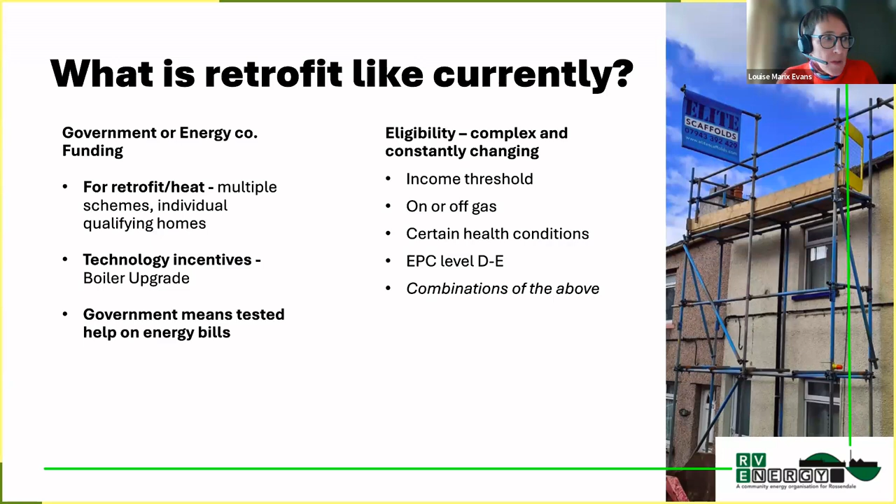So we have conundrums, which is on the next slide. So either we do it individual by individual, which is what many of the one-stop shops go for, so we handhold people through, owner-occupiers, or we might work with an individual landlord, or we go street by street and we tackle a whole neighbourhood across that mixed tenure. So how do we do that and achieve these economies of scale?

So the finance part. It's got to pay. We've got to find a way to pay for it. And the behavioural part. And by that, I don't mean lecturing us about what we should be doing differently as busy people in our homes. What we mean by behavioural might also be termed as practices. So it becomes easy and normal, and my neighbours and friends are doing this as well. It's not a big hassle of paperwork, multiple quotes. So it's an easy way to do the technical, the financial, and the people part, if you like.

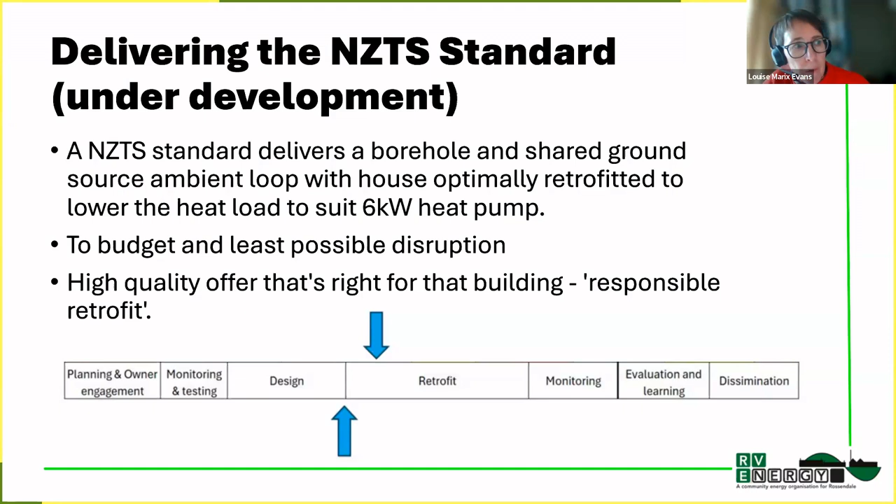So now we're going to talk to you about this next bit, which is how we are using the demonstrator homes to develop a standard. So on the arrows, you can see there that we've got a couple of blue arrows. One is the arrow of where we are now. What's happening in the real world now is the top arrow, so the retrofits being installed. We're going to talk to you about that bottom arrow bit of all the stuff we did to get ready.

In the last webinar, we told you what we'd been doing around engagement and around monitoring and testing the homes. So if you want to know more about that, have a look at the previous webinar. But bearing in mind now, we've got all of our monitoring information. We've done the assessments and we've had the design done. So we will now talk about what we had to do to get set up before we installed.

But the aim of the standard that we're trying to develop is a standard that delivers the borehole and the shared loops down the whole street at once. I saw there was a question on that. You do the whole street, get it all in, and then later people can connect. As long as we've got the base load of people who want to connect, that third of a street, that magic number, they connect, and then subsequent people can then connect in and get the retrofit.

The point of the retrofit is enough responsible retrofit to mean that house can exist happily with the 6 kilowatt heat pump. So there was a question about why don't we get rid of the need for heat completely. We're not going to a total no-need-to-heat passive house kind of standard, because it will cost probably as much as these houses are worth to deliver.

So we want to deliver enough retrofit wrapped around that sustainable low carbon heat that sits in the ground for a long time that we can just pull out efficiently, much more efficient than an electric boiler. And we want to deliver it all to very high standards with the least disruption and to a budget that works for us. So that is the conundrum that we're tackling. So I'll hand back on, and you can see what we did to get ready to deliver the demonstrator.

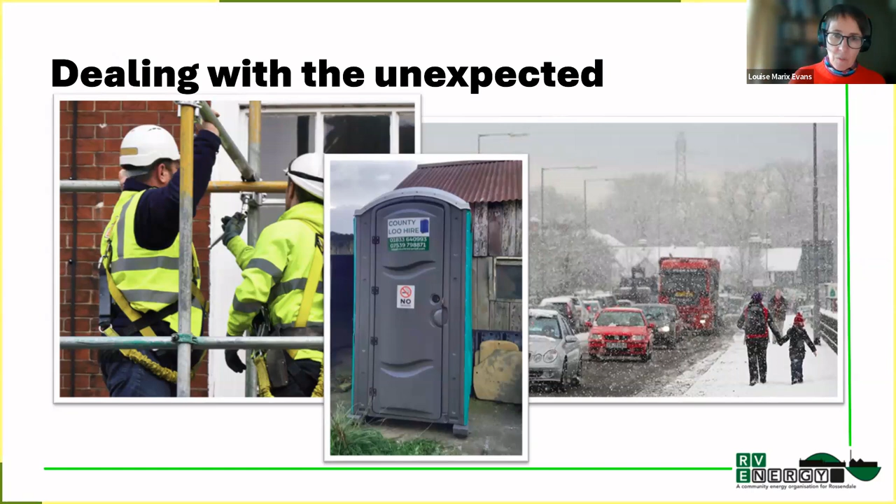And another one, to me, unexpected, that, looking back, not surprising. Contractors, do they need welfare facilities, portaloos? And if so, who hires it? We found we didn't have hire and insurance as a community energy organisation. That would have added a bunch of extra costs. So all of this really detailed stuff that as local authorities you might be used to your contractors taking care of, we've been learning about that so that we can get the process really smoothed out, so it can be done at a local level using local suppliers, not farming it out to a great big top tier company necessarily, although that's not being ruled out.

Moving on to sort of things that we have learned. I know retrofit's hard. I've evaluated lots of retrofit schemes in the past. I've helped set up new retrofit schemes. Watching it happening at really close quarters has been really interesting. And I think that learning by doing is really important to give us integrity and to know that we are all over the detail. So big cheer out for Amaryllis Goodspeed, who's our demonstrator lead, and Andy Pinches, our ops director, who've been wrapped up in high-vis jackets and spent a lot of time on cold sites sorting things out.

I think a lot of the learning has been council specific, dealing with council's legal, dealing with council's housing, but that is real stuff that we would face if we were dealing with social housing, landlords, owner-occupiers, and the shops and commercial premises you find down terrace streets. So all of those same issues are going to come up. There were some things that came as a surprise because it was new to us. We knew we didn't know everything. We were also under time pressure. Our funder, Innovate UK, wants to see results. We've got to get this done.

We want to get it done before the end of the winter so that we can have the remaining heating season for our monitoring. And of course, we have to work around tenants. So the time frame is tight and demanding.

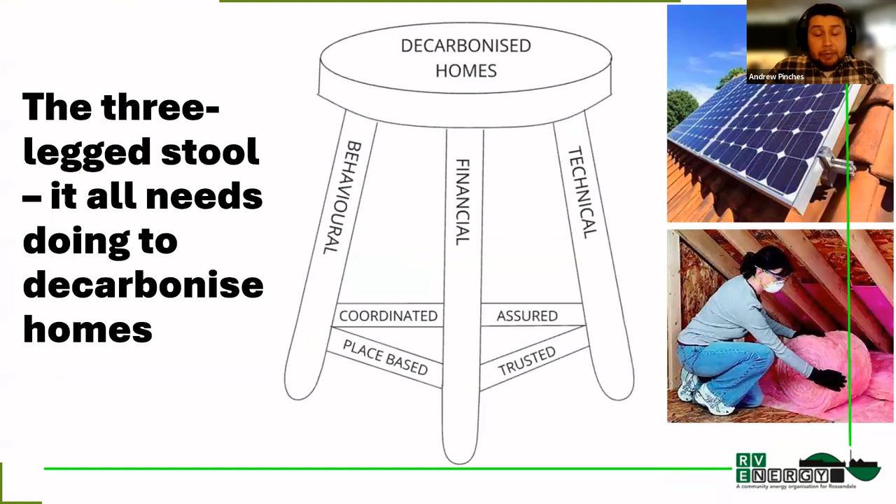Yeah, okay. Back over to Andy, I think. Yeah, thanks, Louise and Natalie. Some really valuable lessons in the keys of success through preparation, getting things in line, but always being ready for that level of unexpected. I will now wait briefly for the slides to catch up, but I will bring you through the work to date as to where we're up to and what we've been doing.

And here we go. So it's not. We move on to the next one.

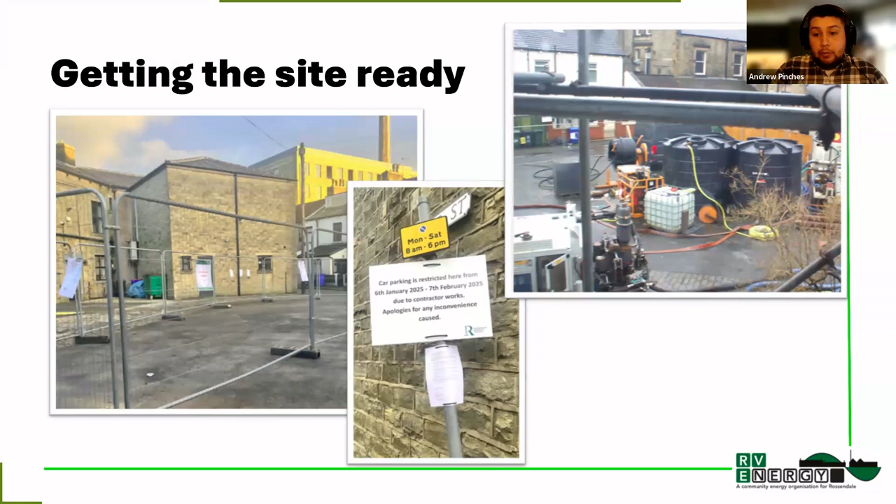There were also 2 fire escapes that came out of the back of a local business right into the compound, so we made efforts to create a safe passageway through to a fire safety point, which moved as we did the work. While the compound was being constructed for drilling and all the equipment was being delivered, as Louise mentioned, scaffolding was put up on the properties for initial roof inspections. The roofs were then stripped and relaid because they needed quite extensive works. And now brackets have been installed, ready for solar panels to be fitted on top.

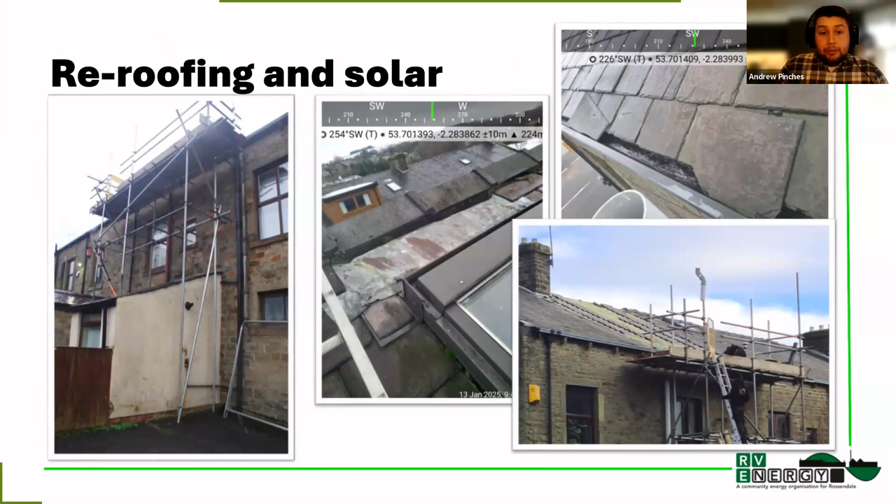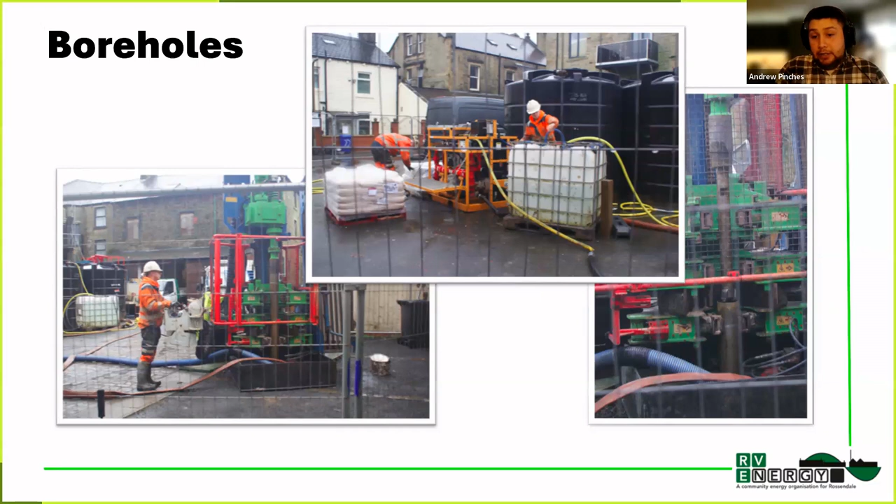One thing that surprised me, and a number of my colleagues, was that it wasn't that noisy. The first 5-6 meters were pretty noisy as soon as it started getting into bedrock. The compressor in the background seemed to be louder than the actual drilling itself. I was expecting jackhammer level of noise, but it was really very quiet. And there was also no vibration, which I thought would be a big thing, but it was very, I'd say, pleasant. It was not what we expected.

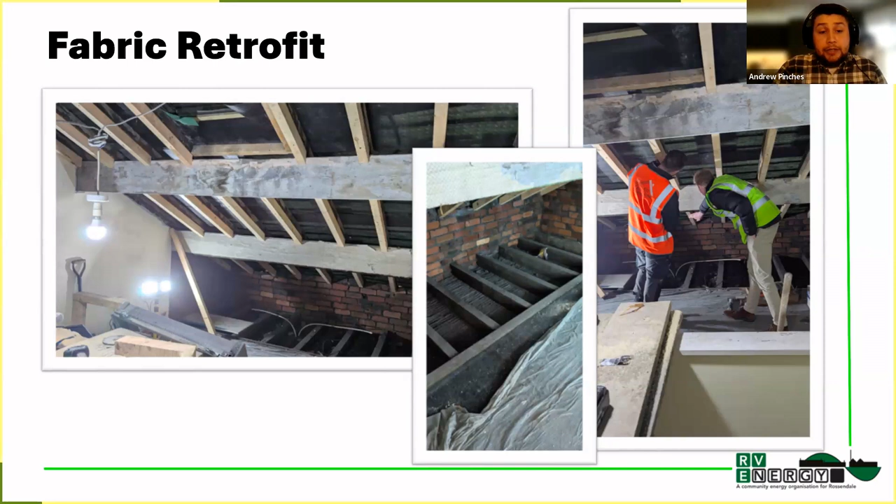Work has also started internally in the attic spaces to install insulation in the rafters and the floor space, as well as an insulated Velux window that's going in. As you can see from the pictures here, and as Louise mentioned, additional timbers needed to be fitted to the roof space to accommodate the insulation depth needed in the required specifications.

And then work is progressing well internally. But the demonstrators are not just about retrofit work and to see some drilling in built-up areas, it's about making a difference. And monitoring equipment has been in place since early last year, so we can evidence differences between then and when the retrofit and the heat system has been completed.

And we're gathering really granular data all the way down to which doors and windows have been opened, indoor, outdoor temperatures and humidities, so that we get a good idea of how well the system is performing. And then finally, I will pass you back over to Louise, who will take you through the final section of this afternoon's session, the money. Louise.

Thanks, Andy. Yeah, I've just been checking. There's some questions about the money.

Okay, so how on earth do you pay for this? As I outlined at the beginning, a lot of this is paid for at the moment either by government grants or government incentives, or people trying to find the money themselves, and that's leaving a big chunk of people out. So I wanted to just briefly bring you up to speed on our current financial modelling and our investment plans. And this is very much work in progress.

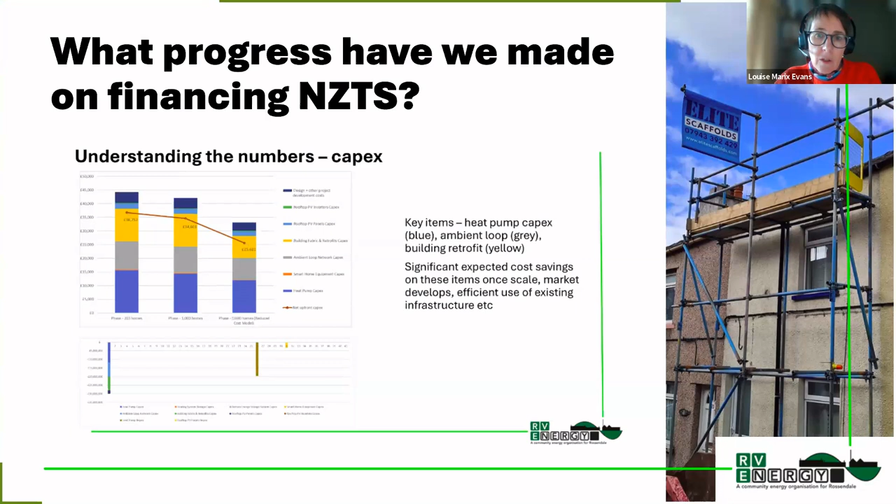So we're pulling information in from the techno-economic model. There might be different costs for different areas. And then Ainsley at Abundance is working this into the models and is coming up with this drop-off where we can make it cheaper to install whilst maintaining high quality. It's also cheaper once people attached to the system that's already in place.

We know that we can't make it investable at the moment. It's in the negative without grants. Otherwise, everyone would be doing it. But as we will need some subsidy, we will need to merge some grants in to start with to prove it. We'll bring social investment in at that point. We may need some subsidy, which could taper.

And then when we get to our lower cost model, we're getting up into a return on our investment. It's still quite low. It's only around 4% at the moment. And these are very rough figures we're sharing with you here. It's not the end of it. We are still working hard, but we can bring it into the positive.

So we've got other investors we're talking to. As a local authority, you might want to talk to the National Wealth Fund. You might want to invest. We may end up with joint ventures. So we are moving towards a better looking model. We're positive, we're all optimistic we can get to that. We are still pulling in more detailed figures, so we're not ready to share them yet, but we're moving forward.

And then lastly, we have set up a community interest company, Looped Energy Communities, who will be the people who help manage the standard, the handbook, facilitate local vehicles to get started up, because I can see there's questions on that, negotiate with national contracts, negotiate with investors, and critically negotiate with government to say, this does need backing now. These communities are left out at the moment, and we need to work with some combined authorities.